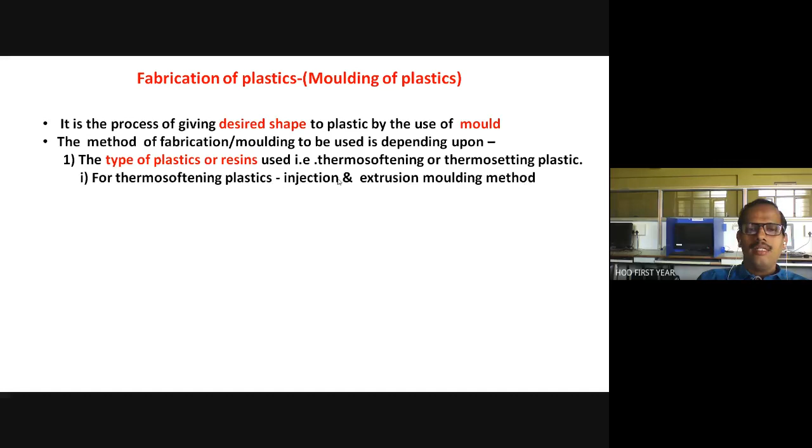Thermoplastic or thermo hardening, and second is the shape to be given. So accordingly, we have four molding methods: compression, transfer, injection, and extrusion.

Compression and transfer molding are used for thermosetting mostly, but they can also be used for thermo softening plastic, not preferably thermosetting plastic. Injection molding and extrusion molding are exclusively used for thermo softening plastic. That is why I wrote only.

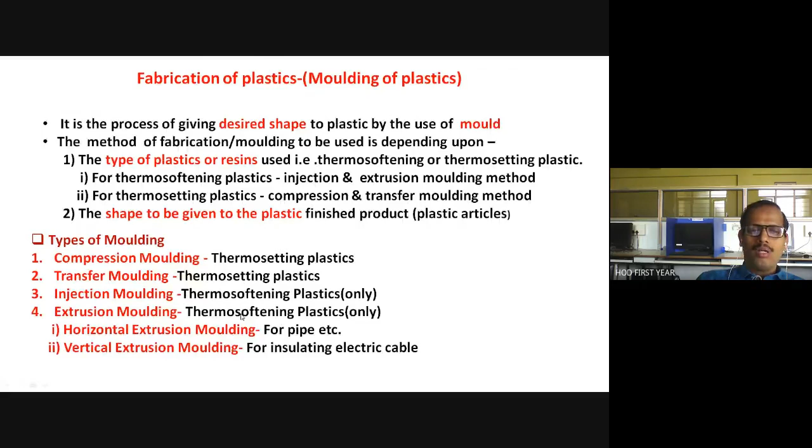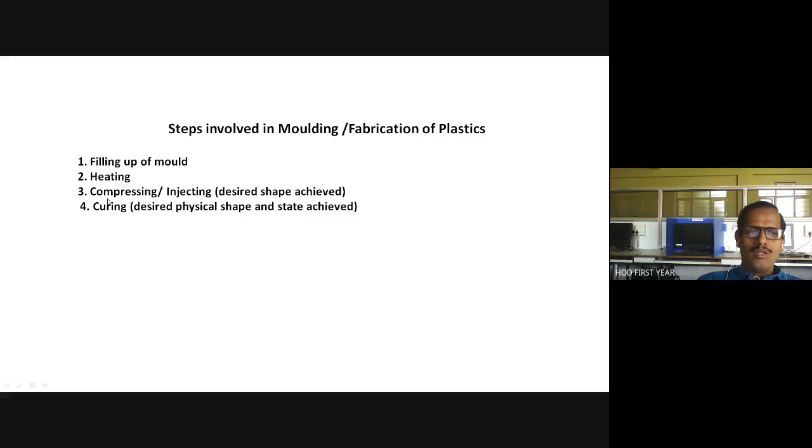So accordingly, this is what the procedure expected from you. As I told you yesterday, you should draw a neat labeled diagram as per the question. Proper diagram. Then in procedure, you should write first about filling up of a mold, then heating, then compressing or injection into cavities to get desired shape, and finally, most important step is curing, to get desired physical state and shape. So after curing, the article is ready, and that is then taken out.

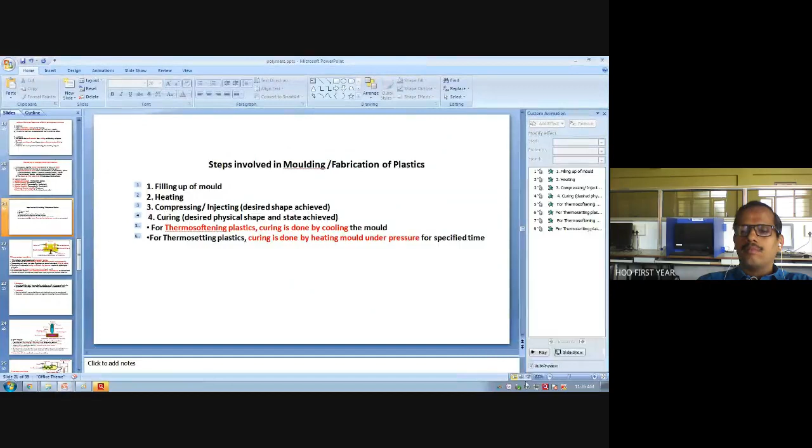Curing for thermosoftening plastic is done by cooling the mold, and for thermosetting plastic, curing is done by heating the mold under pressure for specified time. This difference you should understand. Now, if you know these four steps, you can attend any question based on fabrication.

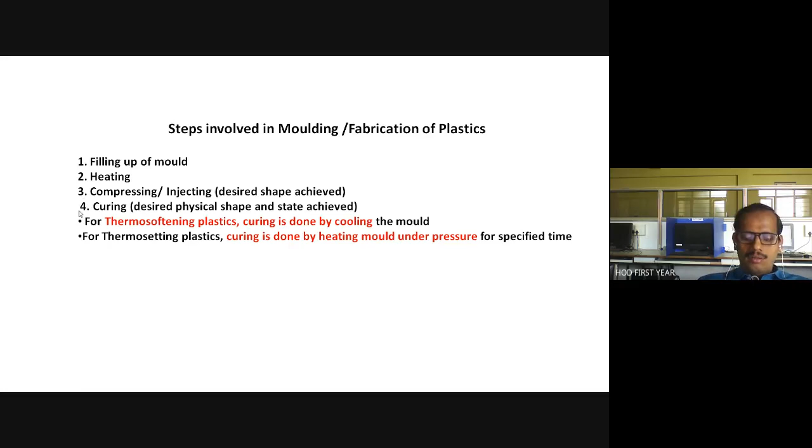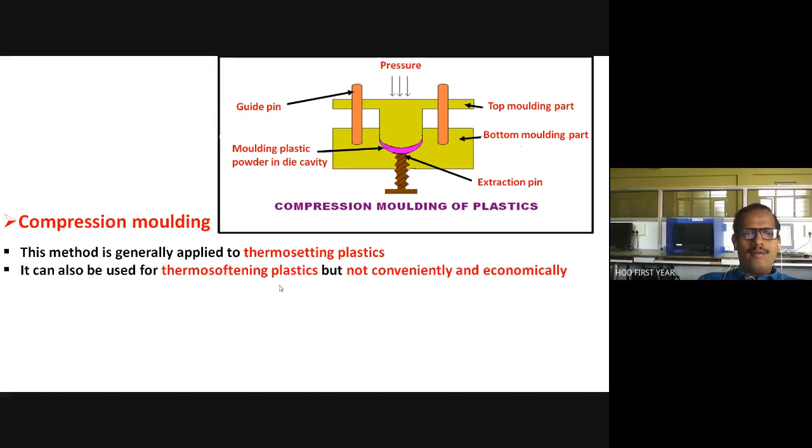So then we studied compression molding. Here, as I mentioned, a neat labeled diagram is a necessary first step, and then you should explain the actual working of the mold. First you should mention the type of plastic that can be molded: thermosetting and thermosoftening both can be molded, but thermosetting preferably, as we studied. Then filling up of a mold, then heating to soften, and finally curing. These three steps you should explain.

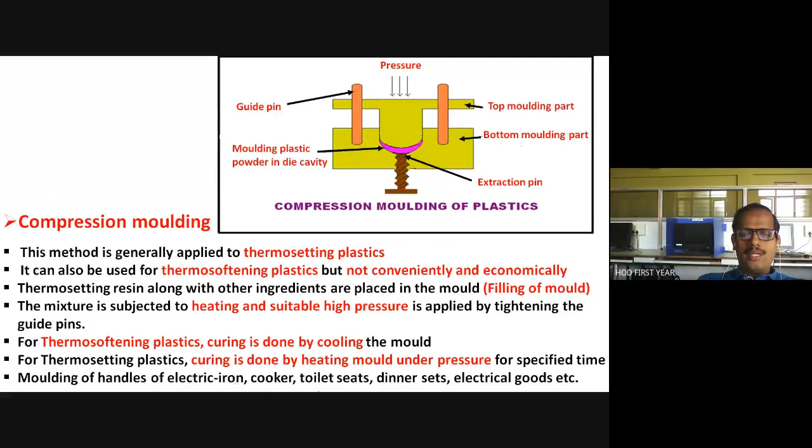Here curing is done by keeping the mold as it is, because this is thermosetting plastic we are molding. And then applications, advantages and limitations. That is the way you should write, as we studied last time. I also showed videos for the same.

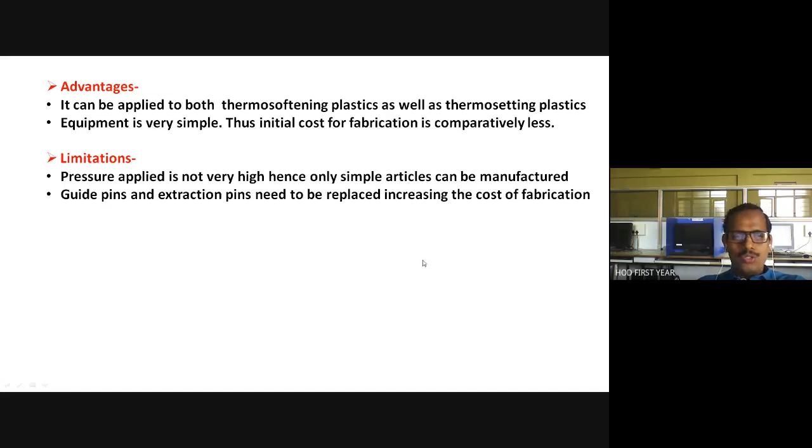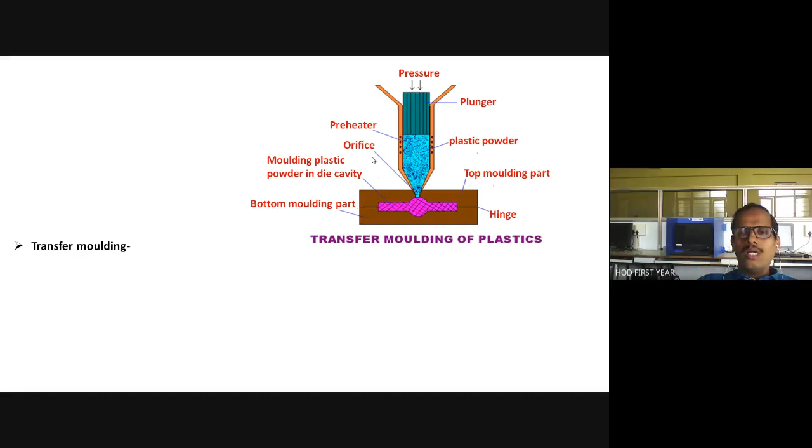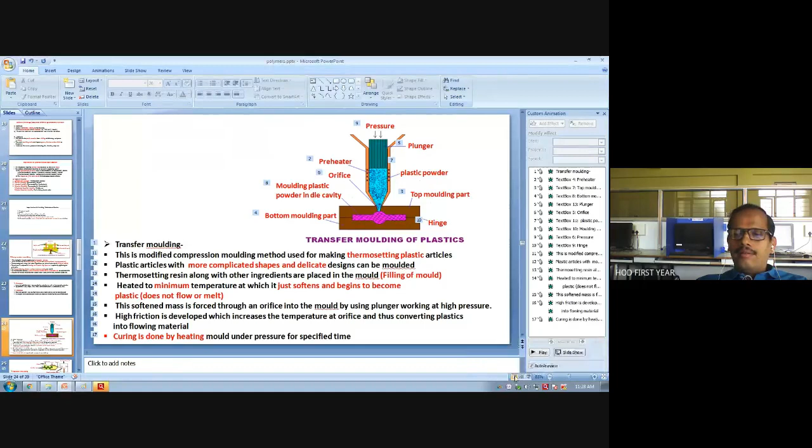Explanation, in a very typical way. First, the type of plastic that can be molded, so it is thermosetting plastic, but this method is especially used for fabrication of articles having delicate shape, complicated shape, which compression molding cannot achieve.

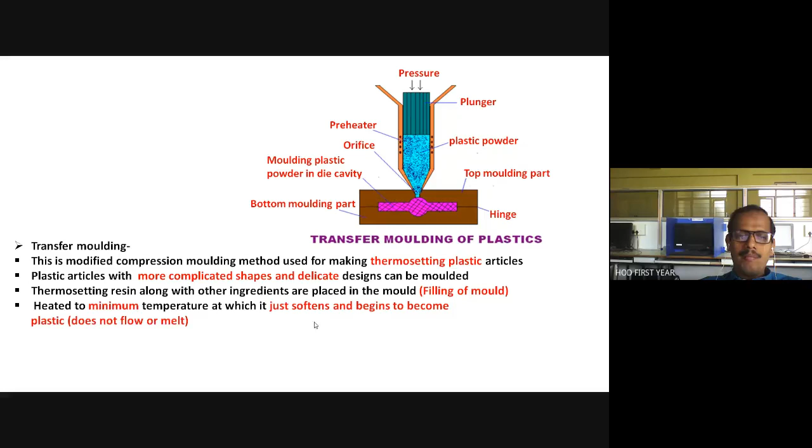So first step is filling up of a mold, then heating to minimum temperature. That is very important, and then inject it into the die with the help of the plunger, and the desired shape article is produced, and then it is cured by keeping mold as it is for specified time. So here you will not find applications, advantages and limitations, but that is required. So in the video yesterday it is there, right? Advantages, limitations and applications, those must be there in your answer.

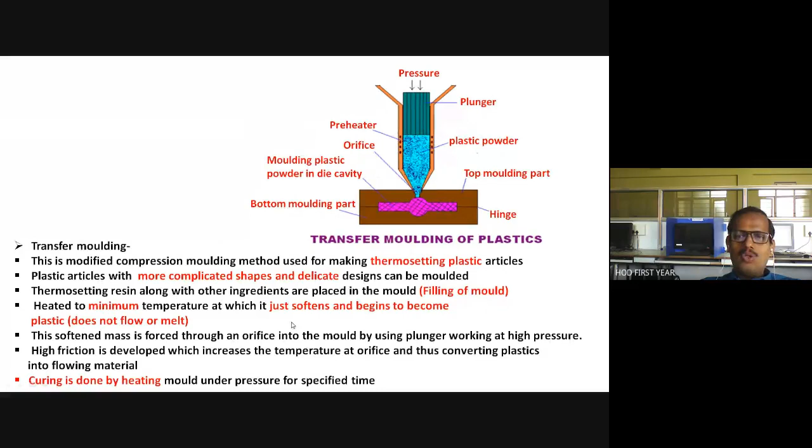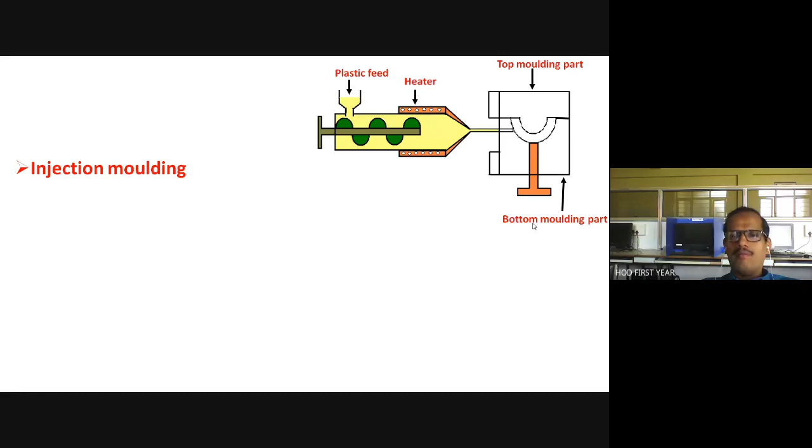Then injection molding. This is the injection mold. So also typical parts, you can write top molding part, bottom molding part. Then hopper or plastic feed. Injecting screw, sometimes it is Archimedean screw, but if you don't remember the word Archimedean, then you can simply write injecting screw, no problem. Plastic powder in die.

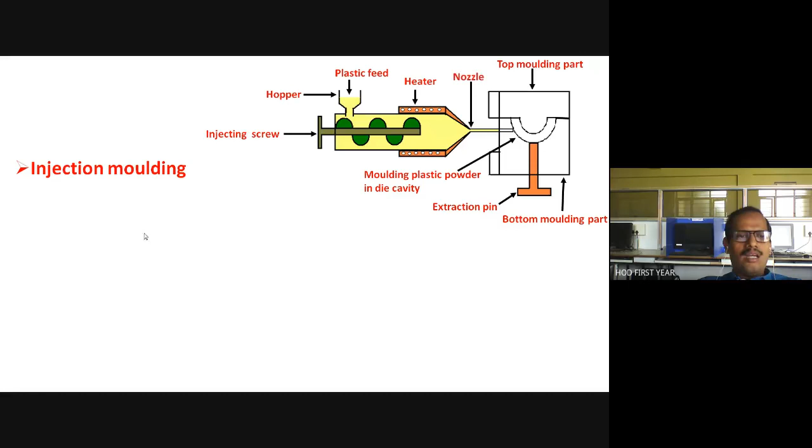Then injection molding working. First, the type of plastic that can be molded, thermo softening. Then the first step is feeding and then softening by heating. Then injection of that material into the cavities of the die. So the article will be produced, and that is cured by cooling.

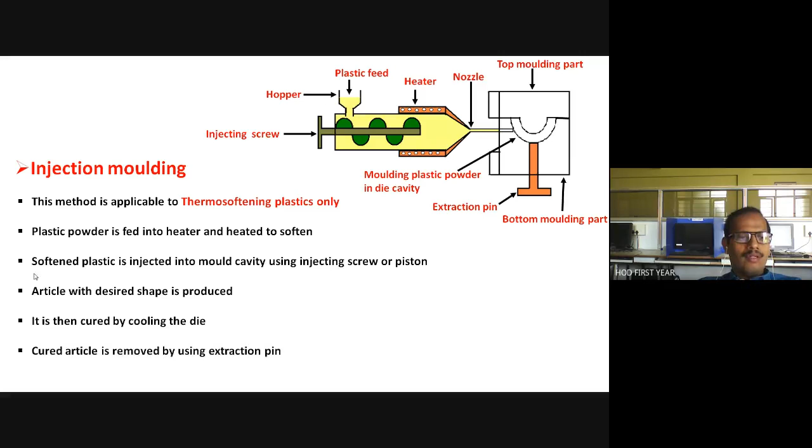Now here continuous cooling is applied, because the resin is thermo softening and the reaction is exothermic. So a large amount of heat is evolved, and we need to remove that heat for the completion of polymerization. So the cured article is removed by using an extraction pin. Then applications, advantages and limitations, we have seen everything. So this is the way your answer should be.

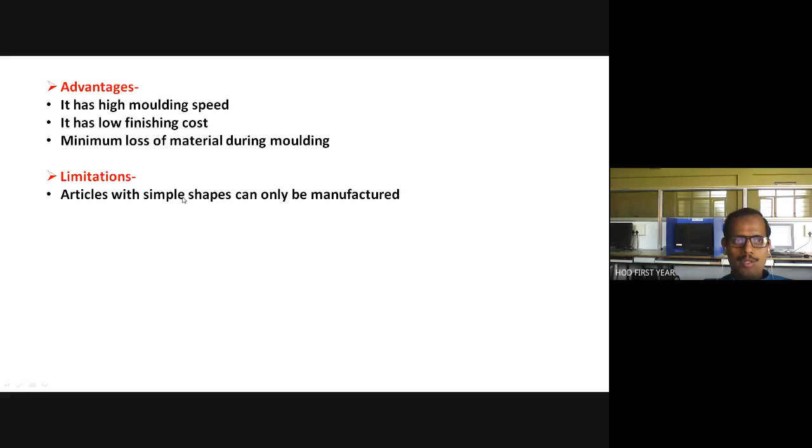Then extrusion molding. We mentioned extrusion is of two types: horizontal and vertical. Horizontal is used for fabrication of continuous articles like tubes, rods, sheets, etc., having continuous shape or uniform cross section. And vertical extrusion molding is for coating of plastic on metal wire, meaning insulated electric cables.

So you must understand the difference between these two methods, because if a question is asked like describe the suitable molding method for the fabrication of insulating cables, you should first mention vertical extrusion molding can be used for fabrication of insulating cables. Then you need to draw a diagram for vertical extrusion molding, explain its working, then advantages, limitations. And if the question is like how can you fabricate a PVC pipe...

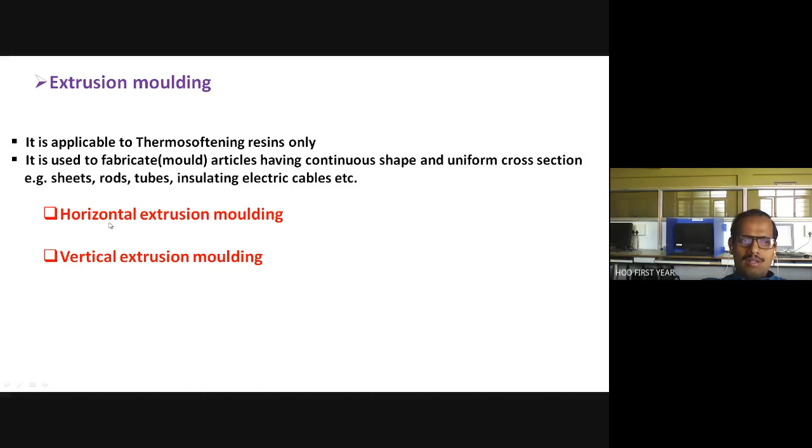So here you should mention horizontal extrusion molding can be used. You have to draw a diagram for this horizontal extrusion mold and explain the working accordingly. This is the horizontal extrusion mold that we have studied last time.

It's very easy to understand. The first step is filling of the mold, meaning the heating chamber. All plastic ingredients are taken inside this heating chamber through the hopper. The second step is heating to soften, done with the help of heating points or heating coils.

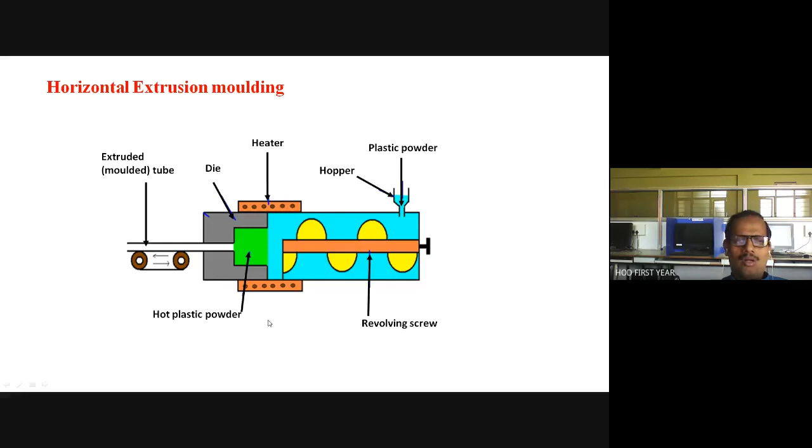Once the material is softened, it is pushed forward with the help of a revolving screw. As this screw revolves, the molten plastic is pushed forward, passes through the die, and gets the required shape. Here we have an extruded tube or pipe that is cooled for curing purpose, and then it is taken out. That's the actual working that we have already studied.

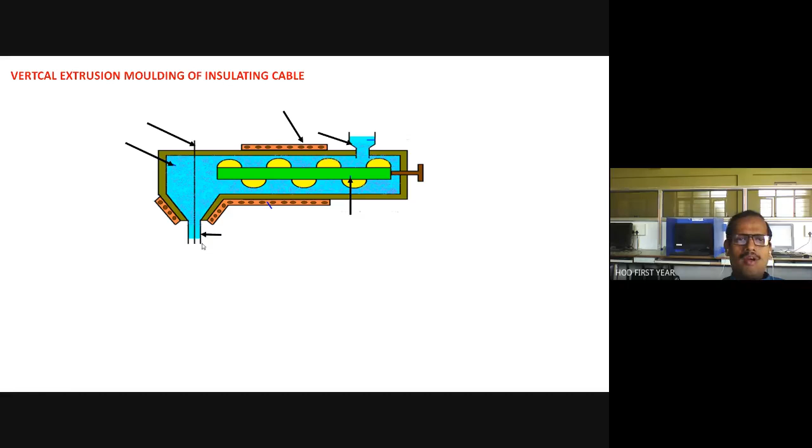I just explained also, and also I have shown you a video. This extrusion molding is especially used for coating plastic on metallic wire, to fabricate insulating cables. So here vertical extrusion molding will be used.

What is the difference between horizontal extrusion molding and vertical extrusion molding? There is only one difference. In vertical extrusion molding, the die is kept at a position at right angle to the direction of the revolving screw. That is the only difference.

Otherwise, the working is the same. First is filling of the heating chamber through the hopper, then heating to soften, and the revolving screw revolves at high RPM. As it revolves, molten plastic is pushed forward, and simultaneously metallic wire is inserted from the top part, which is at right angle or perpendicular to the direction of the revolving screw.

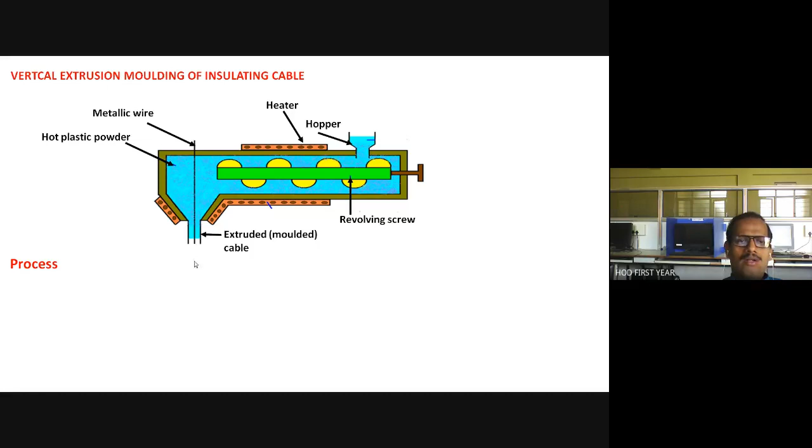The wire is continuously inserted through the die, and the plastic passes through the die. So we get a continuous insulated cable that is cooled for curing purpose. That's all, that is the work.

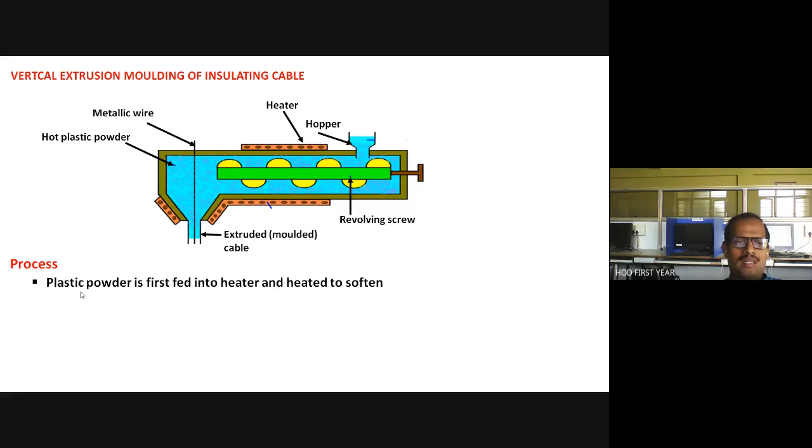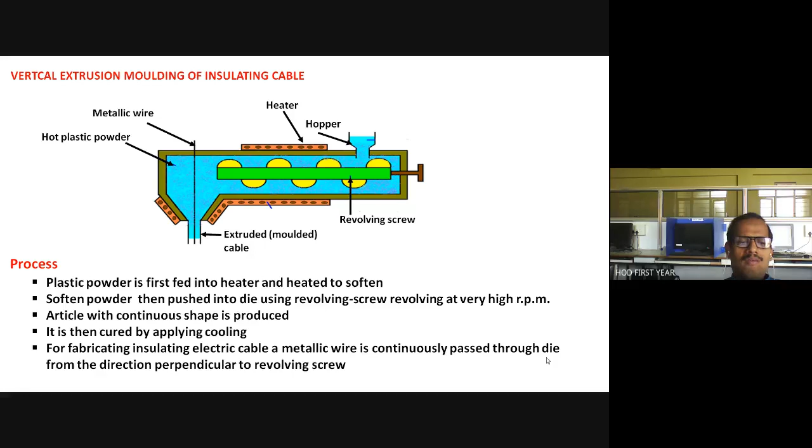Plastic powder is fed into the heater and heated to soften, then pushed forward into the die using the revolving screw, revolving at very high RPM. An article with continuous shape is produced. It is then cured by applying cooling. For fabricating insulating electric cable, a metallic wire is continuously passed through the die from the direction perpendicular to the revolving screw, as I mentioned. So it gets coated continuously with plastic and then cured by cooling.

Very simple. Here also I did not mention applications, advantages and limitations, but those should be there in your answer. I hope you understood how to fabricate plastics.

It depends on the type of plastic and second is the shape to be given.

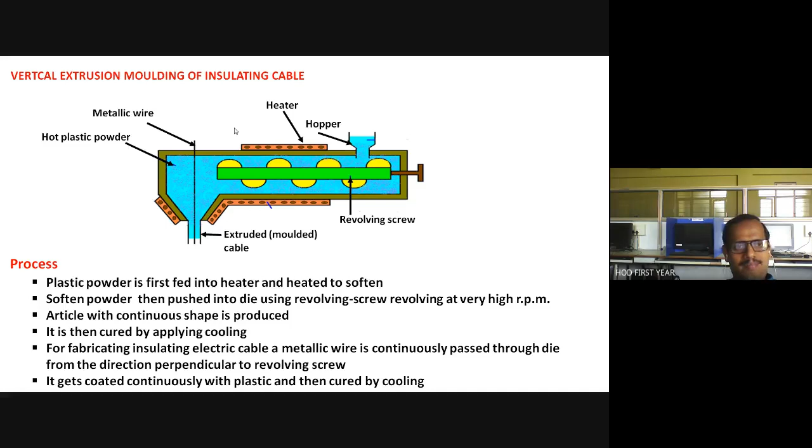Now the next part is again a typical university question, that is, give the preparation, properties, and uses of so and so plastic.

Fortunately, the university has reduced the number of plastics or rubbers. In the last syllabus there were several plastics and rubbers where you needed to prepare chemical reactions, polymerization reactions. But now only 2 plastics are included in the syllabus. First is polymethyl methacrylate, PMMA.

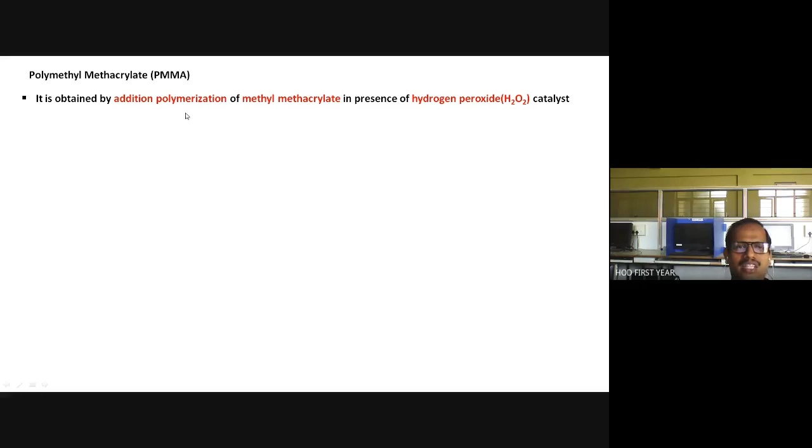It is obtained by addition polymerization, so you should understand that this is an addition polymer. Addition polymer means thermo-softening plastics or thermoplastics. It is prepared by addition polymerization of methyl methacrylate, which is the monomer for the PMMA polymer, in presence of hydrogen peroxide catalyst.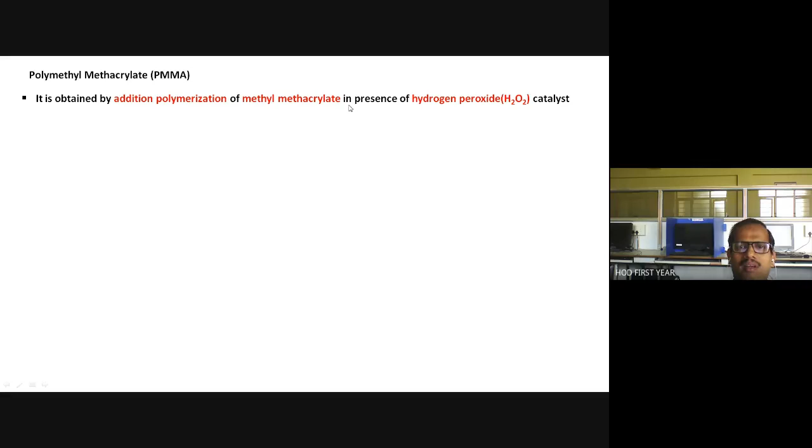Practically speaking, methyl methacrylate is a derivative of ethylene. I told you most of the addition polymers used in engineering or other purposes are in fact derivatives of ethylene. During provisional classes I showed you a lot of such polymers. This is a typical reaction you should understand.

Ethylene means CH2 double bond CH2. After polymerization, whatever the condition, mostly we need peroxide. If I take n molecules, one molecule cannot be polymerized, so when I mix n such molecules in presence of peroxide and heat it, there is no change in the number of carbon and hydrogen.

CH2 remains the same, but the only change is the double bond is converted to a single bond, because that double bond is utilized for bonding or polymerization from both sides. So we get n such linkages together, that is polyethylene.

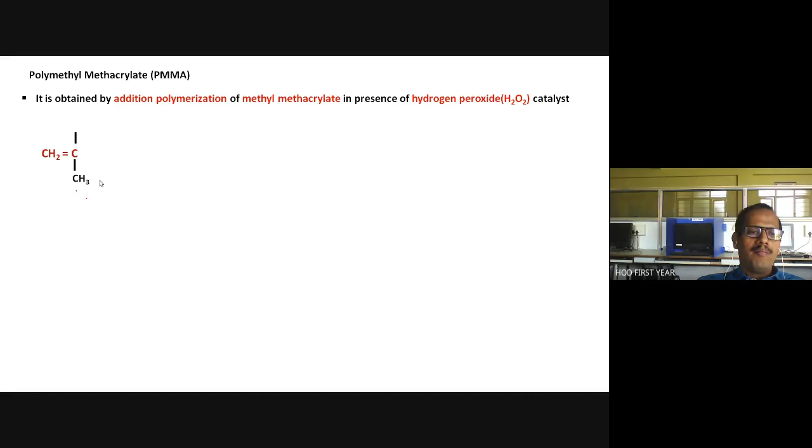So this is the derivative of ethylene. First you should draw CH2 double bond C, then two valencies are replaced, one by methyl group, another by COOCH3. This is our methyl methacrylate monomer. In this case, n molecules should be taken, heated in presence of peroxide.

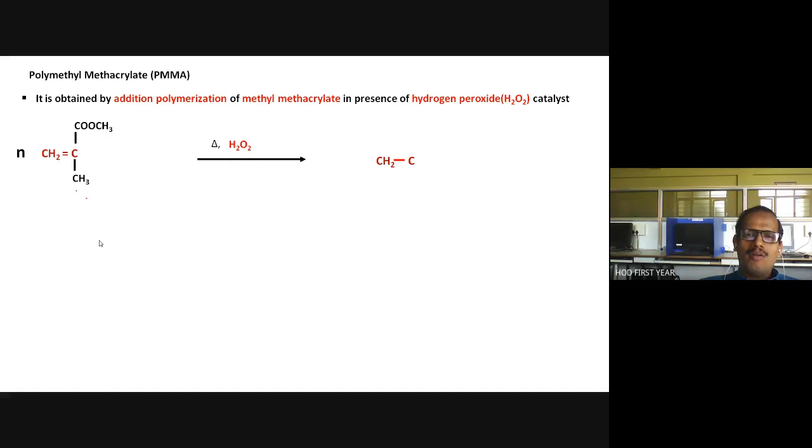What will happen? It's very simple. Just like ethylene polymerized to polyethylene, this methyl methacrylate polymerized to polymethyl methacrylate. There is no change in functional group. Only double bond is converted to single bond, just like polyethylene. So this part remains same. All functional groups remain same, all carbon, hydrogen, oxygen, everything same. No change at all, only double bond is converted to single bond.

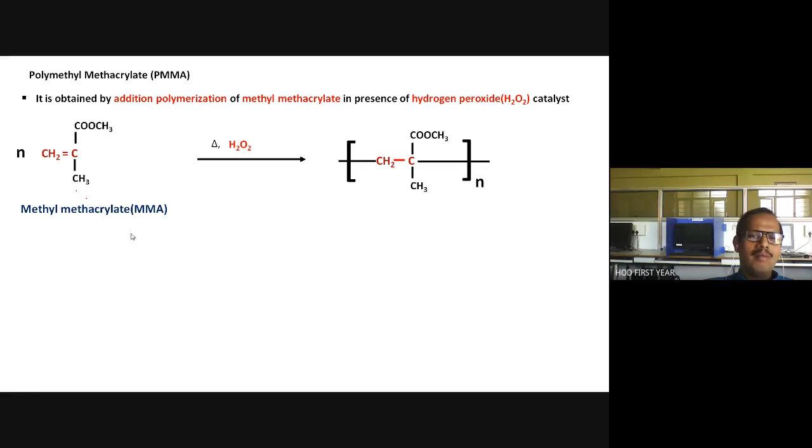That's all, and n such linkages are linked together. That is polymethyl methacrylate, and it is prepared from methyl methacrylate. Very simple. So if you look at the molecule, it is derivative of ethylene, just replace two valencies by methyl and COOCH3. After polymerization, there is no change in functional group, no change in carbon and hydrogen. Only change is double bond converted to single bond, and that double bond is utilized for polymerization linkages.

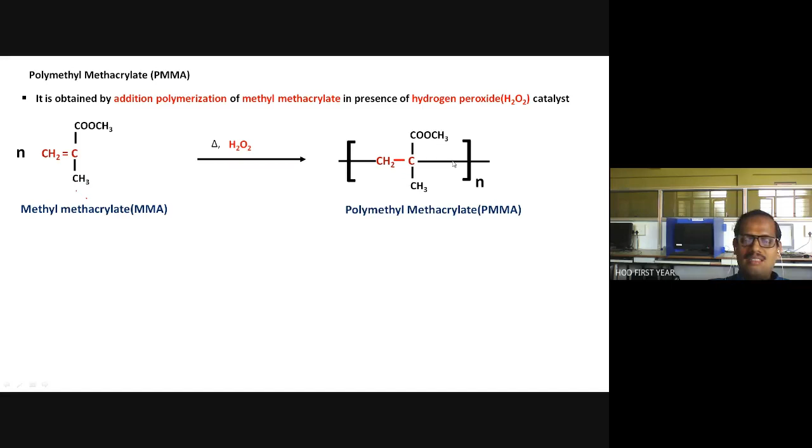And n such linkages are produced. Now, when we have this molecule, we have transparent plastic, just like glass, or I would say more transparent than glass. Refractive index is higher than glass. Can you imagine something more transparent than glass? Yes, but it is possible.

Properties: first property is it is thermosoftening plastic. We have already studied this, addition polymers are thermosoftening plastics. And it has high softening temperature, 130 degrees Celsius. This is again a good property, high temperature, so during molding it will not decompose.

And it has low scratch resistance. This is actually a drawback of this material, not scratch proof - you can scratch it very easily. Its hardness is less.

It has high refractive index. This is the fascinating property, 1.59, higher than glass even, and hence has high optical transparency, more transparent than glass.

It has high resistance to sunlight, high ability of transmitting light. So it's a good plastic because it has good fastening properties to sunlight or heat, to the chemicals, to the moisture, rain, etc.

Uses: since its refractive index is very high, good transmitting property, it is used for making lenses, optical parts of instruments. You may see light fixtures we use at our home. Artificial eye - this is manufactured from this plastic.

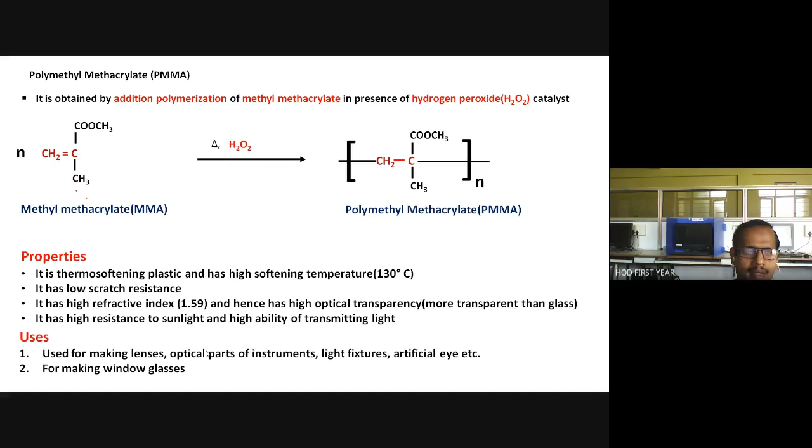Acrylic paint. This is again one more property, it is used in paints.

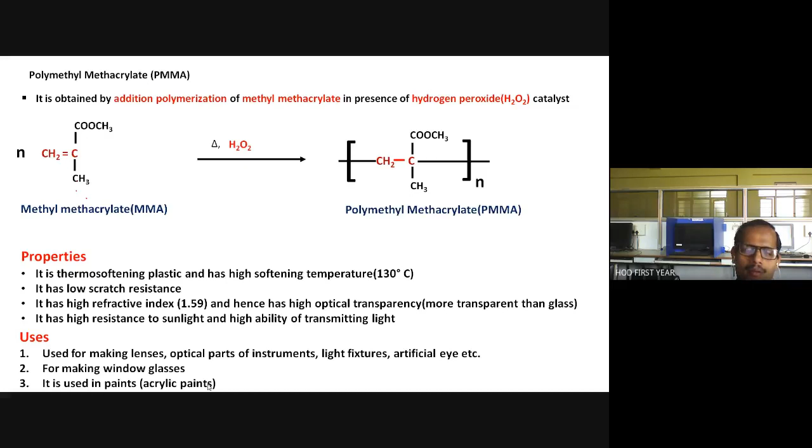Then second is Kevlar. So Kevlar is condensation polymer or thermosetting type of plastic. It is prepared by polycondensation between aromatic dichloride like terephthalic acid dichloride and aromatic diamines like 1,4-diaminobenzene.

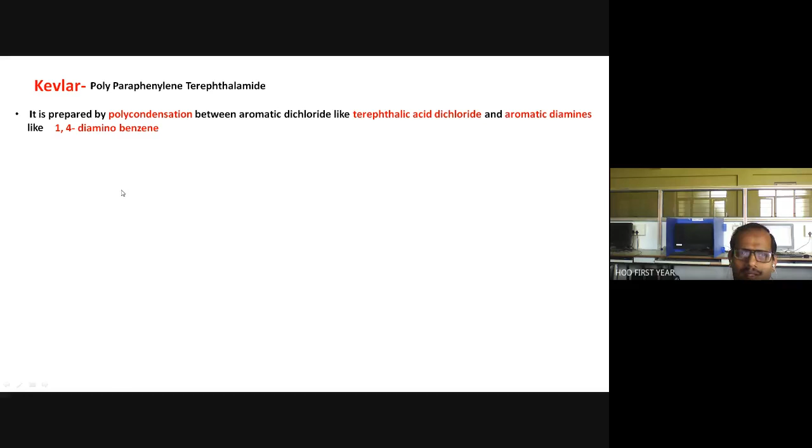Let us see the reaction. Actually, this reaction we have already learned under condensation polymerization, the same thing we have to repeat. I already told this while studying condensation polymerization.

So if you look at the monomers for this plastic, one is terephthalic acid dichloride, which is an aromatic compound - benzene ring is there. Second is aromatic diamine, like 1,4-diaminobenzene, also a derivative of benzene. So benzene ring is common in both cases.

So let us draw the first monomer, terephthalic acid dichloride: benzene connected with two functional groups, COCl, COCl. So this is actually benzene diacyl chloride - this is the acyl chloride functional group, COCl means, attached to benzene, therefore benzene diacyl chloride. Our common name is terephthalic acid dichloride.

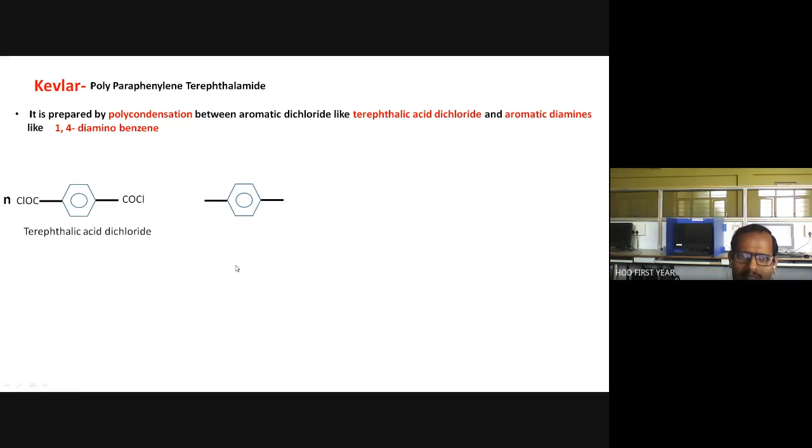Take N molecules, and another is 1,4-diaminobenzene, which is para-diaminobenzene. Amino means NH2 group, and they are linked at para positions. So take N such molecules.

1,4-diaminobenzene, when heated together with the other molecule, what will happen? Condensation, or polycondensation, because many such molecules, N such molecules, react together. So we get polycondensation.

Condensation means reaction between functional groups to remove simple molecules and produce polymer linkages. So here H and Cl will be removed as a simple molecule, and the CO and NH will link together, and amide linkage will be produced.

Again here, NH will link to CO from this side, and this CO will link to NH from that side, and we will get a huge molecule of Kevlar. Benzene remains as it is, linked to CO. Cl is removed, linked to CO from both sides, and CO linked to NH with loss of HCl. From that side also, CO linked to NH, NH linked to benzene ring, and benzene ring linked to NH.

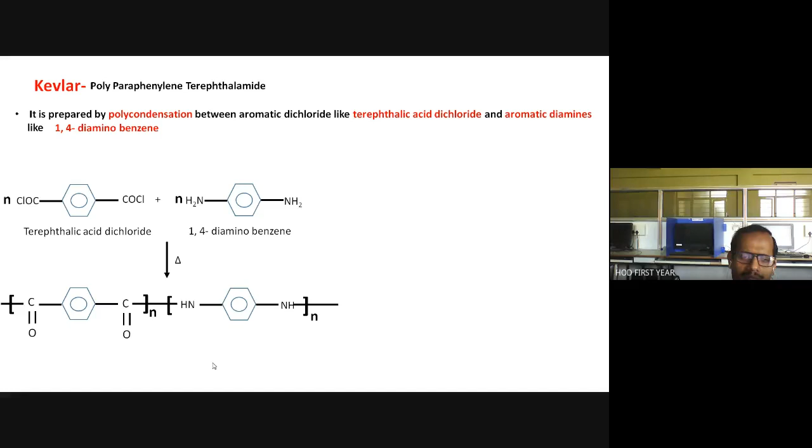Here also we have N molecules of both: this is terephthalic acid dichloride unit, this is the 1,4-diamino unit. There is removal of HCl - that is condensation. 2N HCl molecules are removed, and Kevlar is produced. Now this plastic is very fascinating - it has exceptional mechanical strength.

It is stronger than even steel. Just imagine something stronger than steel - very difficult, and it is polymer, plastic, but it is possible. This is a very fascinating plastic because it has one more inherent advantage. So what is the inherent advantage of plastic or polymer?

What is the most important property of plastic with respect to metals and alloys as far as engineering use is concerned? Can somebody tell me? We studied four materials: first metals and alloys, second ceramics, third polymers, and fourth composites. So when we differentiate polymer and metal...

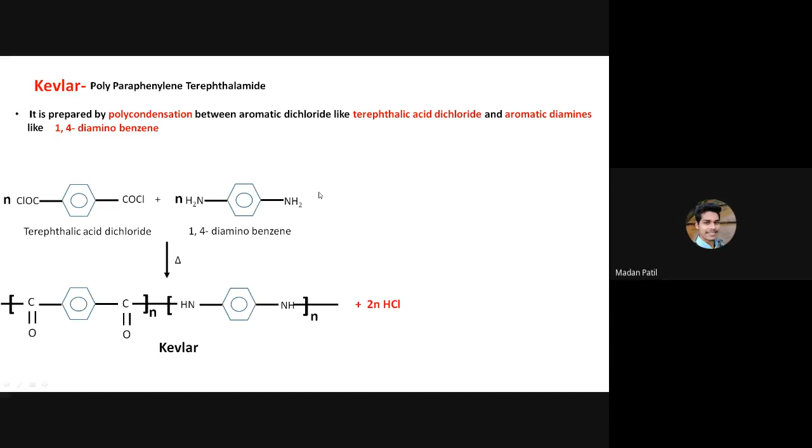But after extracting out metal, suppose I have one metal ball, spherical ball, and I also have one polymer or plastic ball - what is the important difference in engineering perspective? Sir, weight. Exactly, absolutely correct, that is the answer I want. So density, weight is related with density, mass per unit volume - mass per unit volume for polymer is very less.

So in case of Kevlar, we have low density and mechanical strength is 5 times higher than steel. It's a magical material, that is why it is used for aerospace applications. It is exceptionally strong, 5 times stronger than steel, and at the same time density is low.

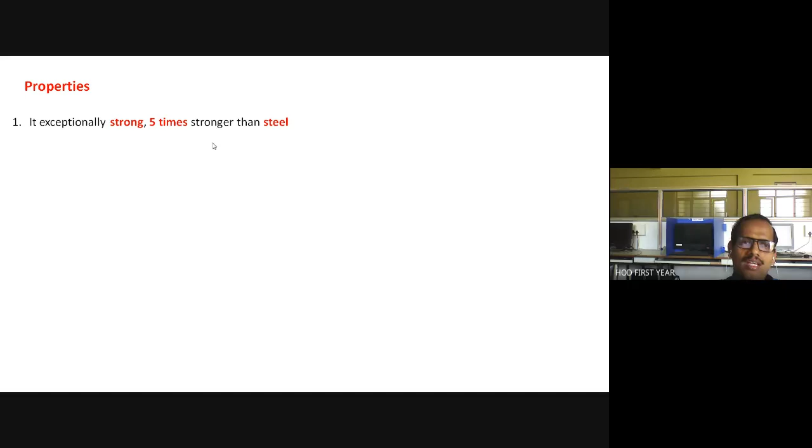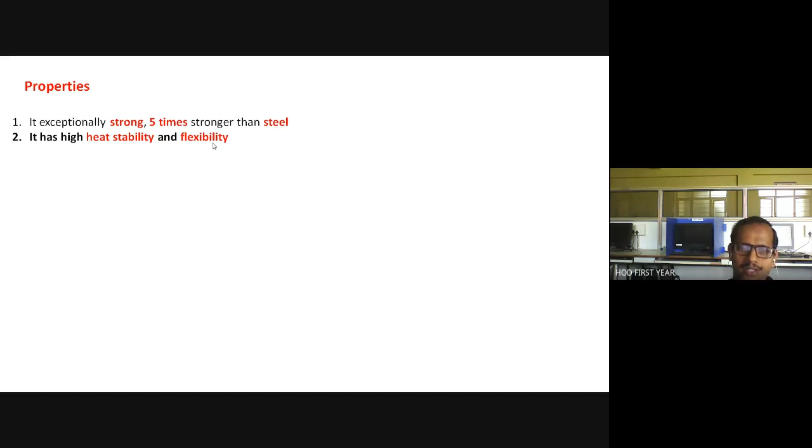It has high heat stability and flexibility - that is one more advantage. It does not lose its strength even at 196 degrees Celsius, almost 200 degrees Celsius it can sustain. Mechanical properties are not varied, that is why this is sometimes used as a structural material.

It has high resistance against almost all solvents except strong acids. It has resistance to almost all solvents, meaning it will not dissolve in acetone, alcohol, or any other solvent, but it will dissolve in strong acid. Why?

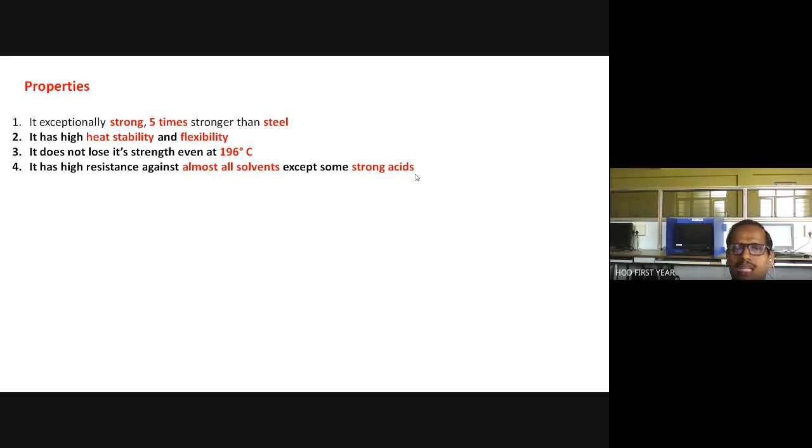Strength is higher than steel. Uses: it is used in aircraft and aerospace industries because of low density and high strength - strength higher than steel. It is used for preparation of vehicle parts, brakes, clutch lining, ropes, cables, protective clothing, bulletproof vests, helmets especially are made from it.

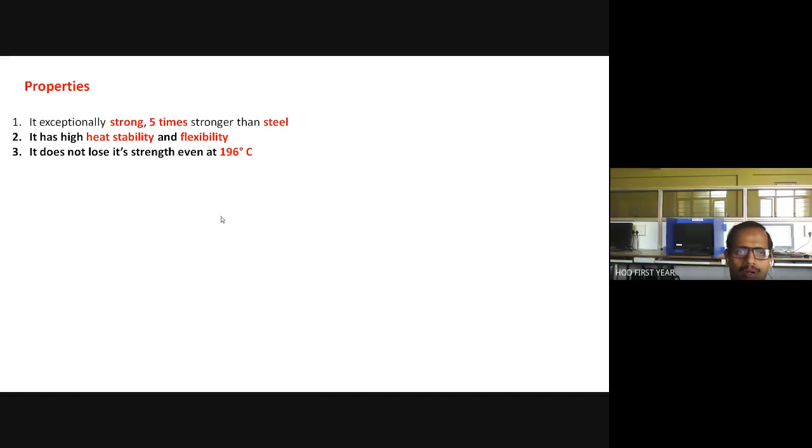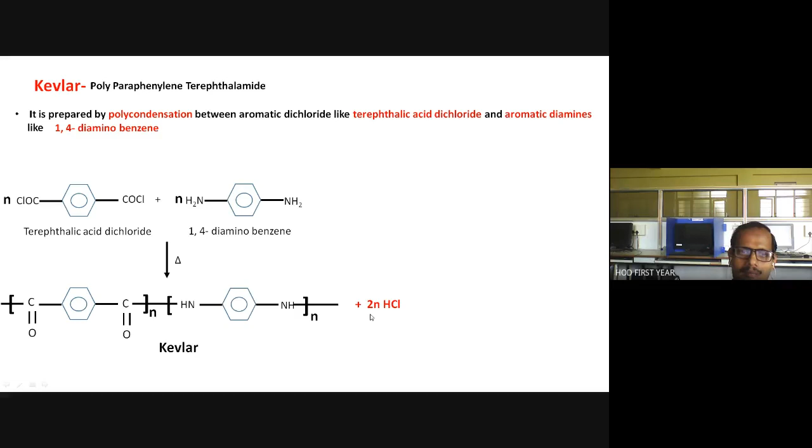So and so forth, several applications. This is the way you should present your answers: first something about the actual reaction in one line, the correct structure of monomers, then polymers, byproduct - it should be correct, that's the key point, and then properties and uses. You can add other uses also if you know.

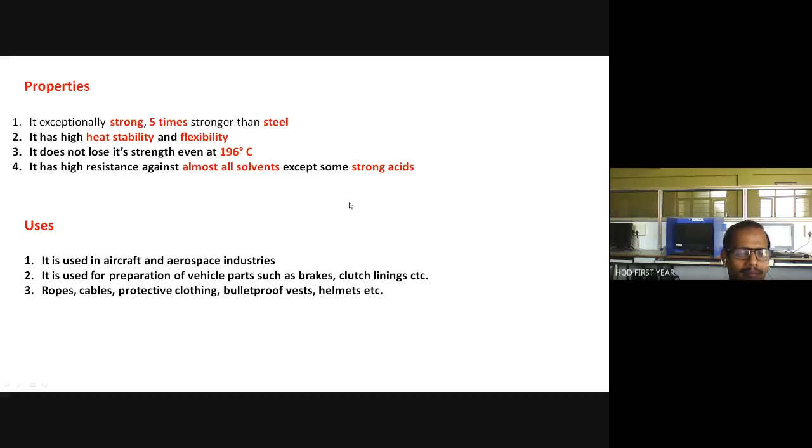Then we will turn to the next part.

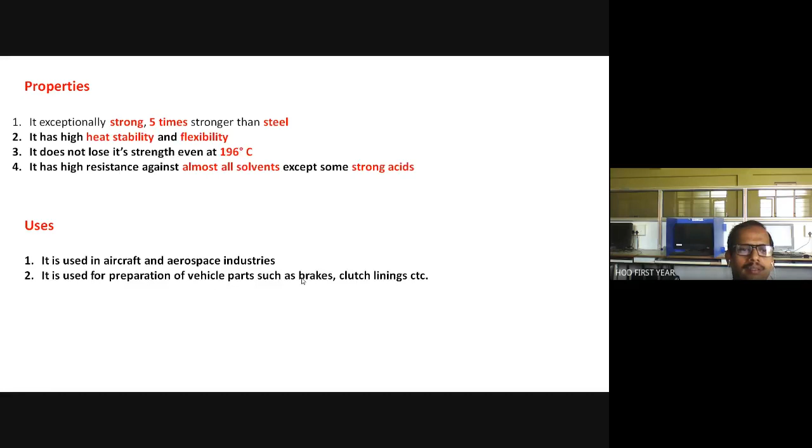Now we will turn to the properties of polymers. Very few are included in our syllabus. This is glass transition temperature, or glass transition state and viscoelastic state. Then molecular weight we have to study, and then conducting properties.

So this is the observation with plastic or polymers. You might have observed that in cold season or cold countries, plastic becomes hard and brittle. That is this property, glass transition state. Plastic is transformed to glassy state. Actually glass is hard but easily breakable, while plastic is flexible and not easily breakable like glass. But at a particular temperature, or below that temperature, they behave like glass and brittle. That is glass transition state.

This is an important physical constant, especially while defining utilization of plastic for any purpose. How is it defined? Temperature below which polymer becomes hard, brittle and glassy. Below that temperature means after cooling, it becomes hard, brittle and glassy. Above that temperature, it is soft and flexible. That is known as glass transition temperature. That temperature is the borderline. Below that temperature, it is hard, brittle and behaves like glass, it breaks like glass, but above that it is safe, soft and flexible.

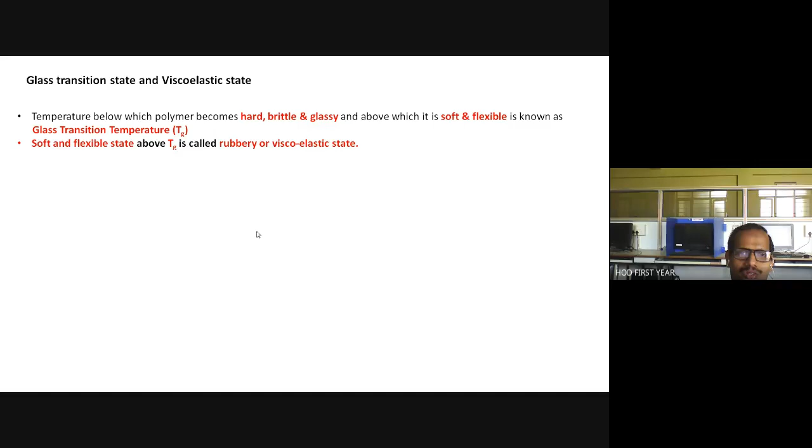So we should know that temperature before its use. The soft and flexible state above Tg is called rubbery or viscoelastic state. After further heating, it becomes viscofluid or viscous fluid and starts flowing, called viscofluid state.

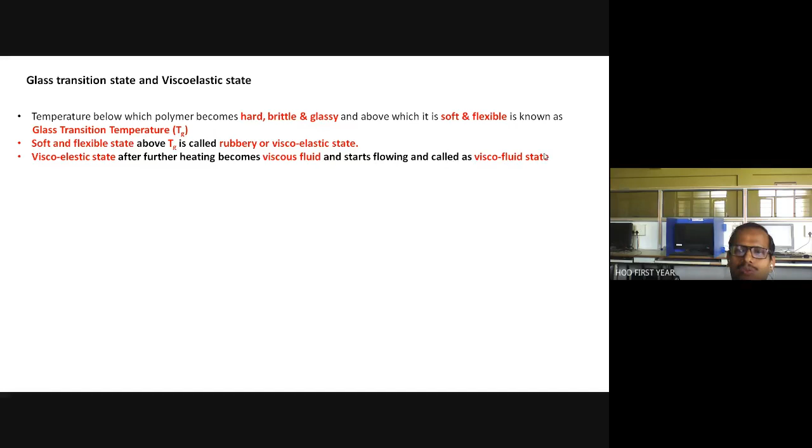Now you will understand from the diagram. This is the temperature line, temperature increases in this direction. So this is our glass transition temperature, Tg. How do we define it? Temperature below this means temperature decreases in this direction. Below this, polymer becomes hard, brittle and glassy, and above it, it is soft and flexible. Below this I have shown glassy state, brittle state, easily breakable like glass, and above it is viscoelastic, flexible state. So this is happening below and above Tg.

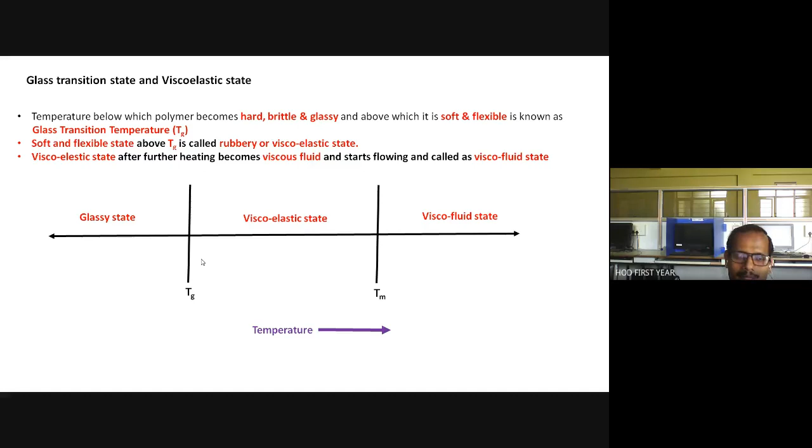Now there is one more temperature line, and that is above Tm. Tm means melting temperature. If we keep heating above viscoelastic state, after melting point we get viscofluid state, and the plastic or polymer starts flowing. That is above Tm. So these are very important properties when manufacturing articles out of plastic and defining its utilization, because there is temperature variation from place to place, country to country, machine to machine. So we have to select proper plastic so that it will not become like glass and will not break.

Now if you look at polyethylene, its Tg is minus 125 degrees Celsius. It's a very safe plastic. Below minus 125, it becomes glass type; above that it remains flexible and doesn't break, like glass. Polypropylene's Tg is minus 18 degrees Celsius; below that it becomes like glass. Polystyrene is 100 degrees Celsius. So you can mention one or two examples, this diagram, and the definition part.

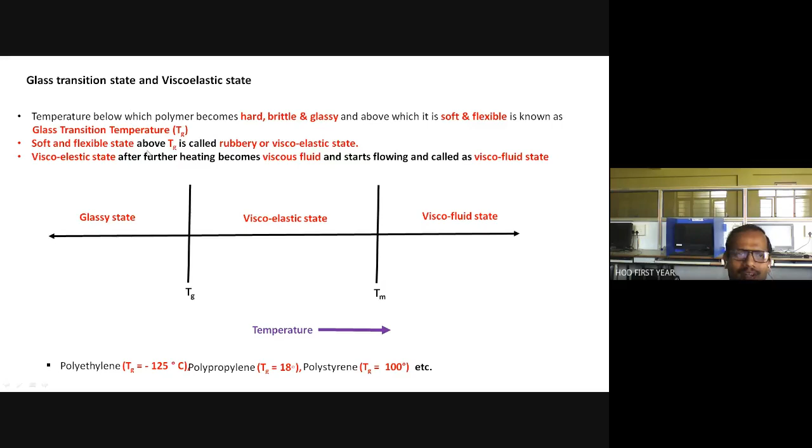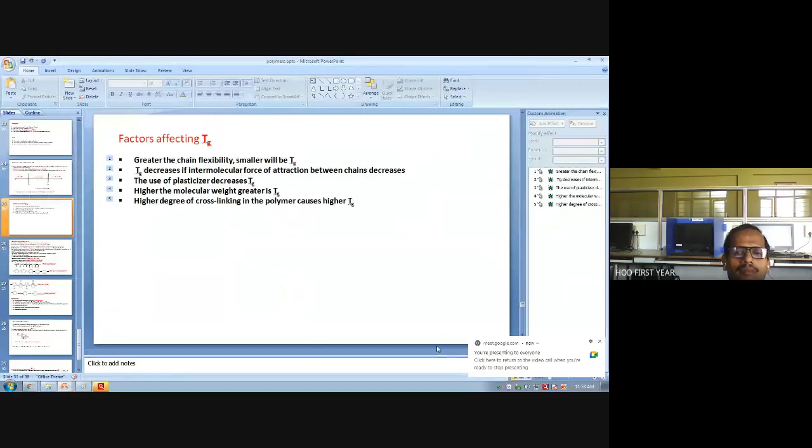Now factors affecting Tg also you should mention in your answer. What are the governing factors which increase or decrease Tg? So what is our observation? Factors affecting Tg: greater the chain flexibility, smaller will be the Tg.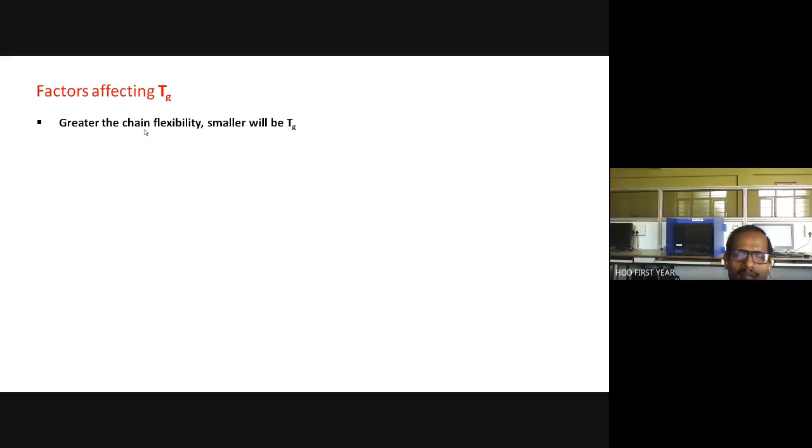So it totally depends on the structure of plastic or polymer. If chain flexibility is high, as in case of thermosoftening plastic where there is no cross linking, smaller will be the Tg. Then Tg decreases if the intermolecular force of attraction between chains decreases, obviously. As this force of attraction between chains decreases, Tg decreases.

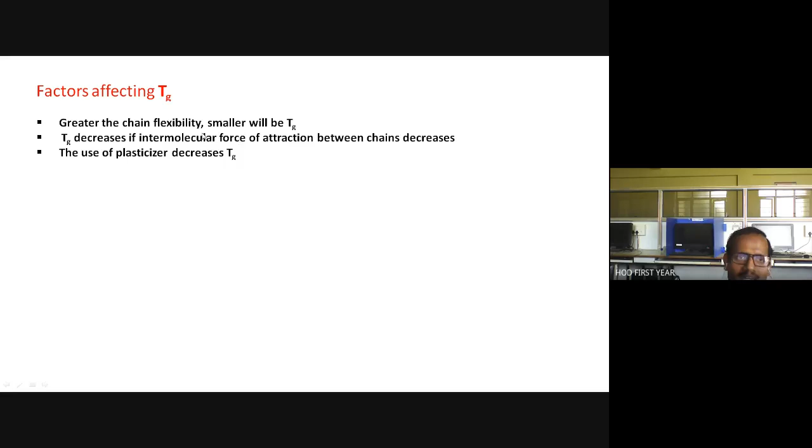The use of plasticizers decreases Tg. Actually we want low Tg, it should be less than the operating or service condition, otherwise it will immediately become like glass. So how to get this done? Sometimes we want that particular plastic to not become brittle, so what we do is modify its property by adding some compounds called plasticizers. When we add plasticizers, they reduce intermolecular force of attraction and enhance flexibility, so Tg is decreased, and that plastic can be used even at low temperature.

Then higher the molecular weight, greater is the Tg. As molecular weight increases, Tg increases.

We saw earlier that polyethylene had Tg of -125, but polypropylene's was higher, and polystyrene's was even higher. So higher molecular weight, higher is the Tg. Higher degree of cross-linking in the polymer also causes higher Tg - this is the counterpoint to the first and second point. More cross-linking means less flexibility, and less flexibility means Tg increases. These are the factors you can mention in your answer. Otherwise, whatever is given on the slide is sufficient for this note.

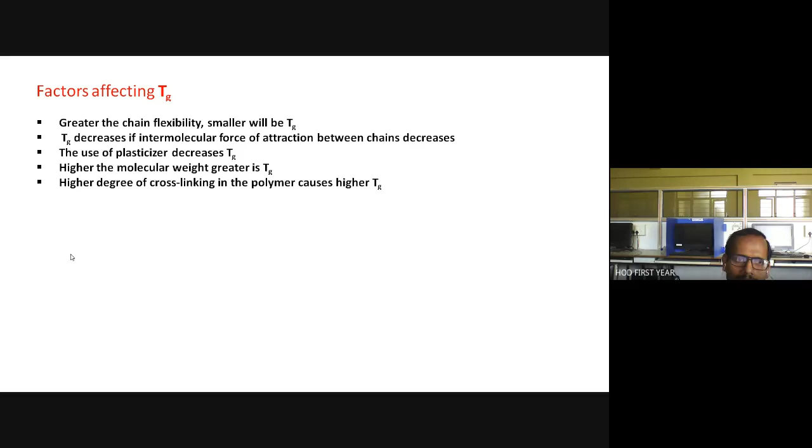Now the second property is again a fascinating one. Actually, this property states the future of plastics or the future of electronics - these are the building blocks of future electronics. Presently we use semiconductors like silicon, germanium, and so on as materials in semiconductors to build electronic components, all circuits - everything in electronics is based on that. But in future, these polymers are going to replace these typical semiconducting materials - these are conducting polymers. Now, when we talk about polymers or plastics, they are normally insulators.

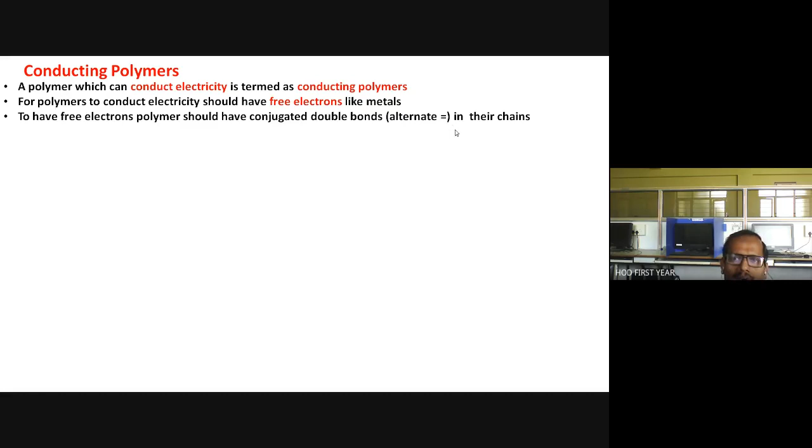So to have free electrons, polymers should have conjugated double bonds. A conjugated double bond means alternate double bond, single bond, double bond, single bond in their chains. If you look at the polyacetylene molecule or polyparaphenylene, you will understand what I mean - conducting polymers have conjugated double bonds.

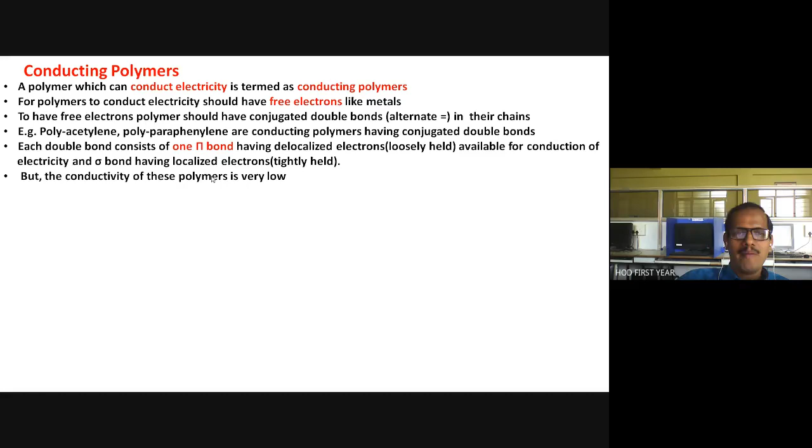But even having pi bonds, the conductivity of these polymers is very low. It is measurable, and it is proved they are conducting, but for practical application that conductivity is not sufficient. Even in case of semiconductors like silicon, its conductivity and the required conductivity is low. So what do we do in that case? Can somebody tell me?

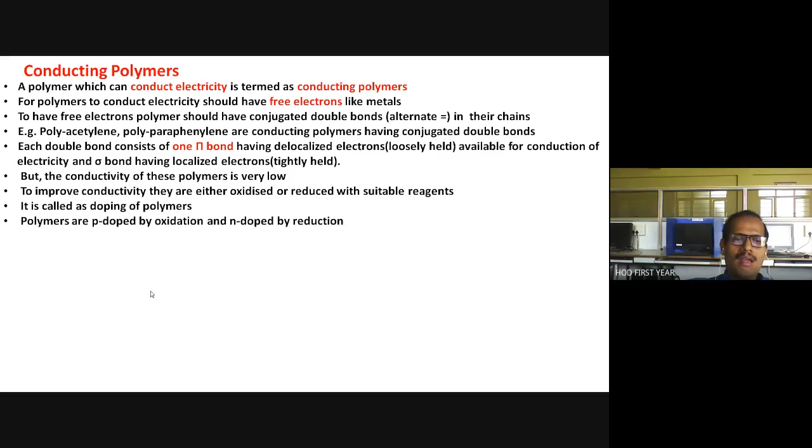So this is what polyacetylene, I am writing now. This is one linkage. This seems to be ethylene. But when it is linked in this way, we call it polyacetylene.

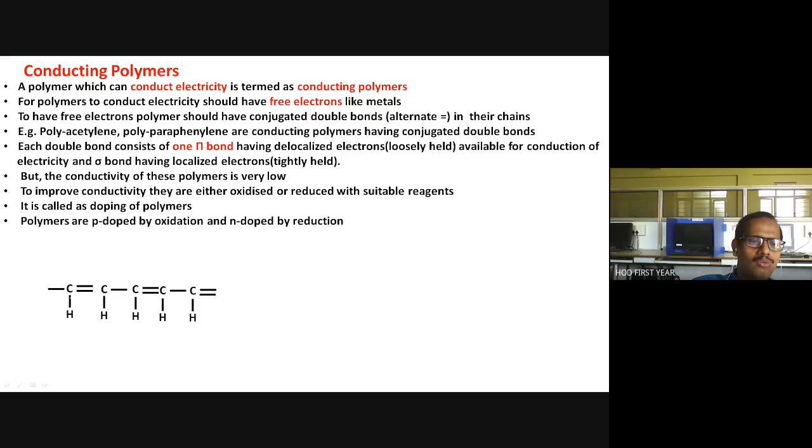Let me check the time, we have 5 more minutes. I will show you how this molecule is derived. This is polyacetylene, but you may think this is ethylene, so why don't we call it polyethylene? No, it's not polyethylene. Polyethylene is something like this.

CH2 N times, that we have studied, right? So this is not polyethylene. Here we have one more bond, so that is why it is polyacetylene. How is it derived? It is derived from acetylene, CH triple bond CH.

This is the monomer in this case, N molecules. When they are heated in presence of peroxide catalyst, this pi bond will be utilized for polymerization. What we will get is this CH, the triple bond is converted to double bond because one bond is utilized for polymerization. Otherwise there is no change in CH, it remains as it is.

So this molecule will grow from this direction and another direction. This will again lead to another polyacetylene molecule this way, CH and CH, so and so forth, N times it will be linked, the same molecule. So this is what the polyacetylene molecule.

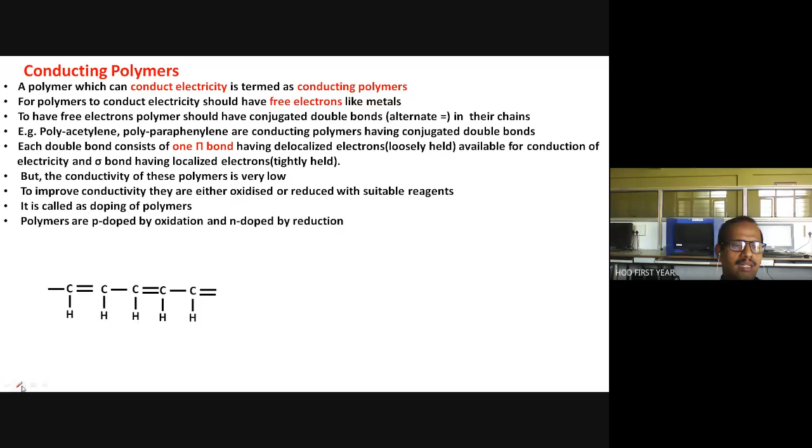So this is polyacetylene molecule. This is one acetylene, this is another, this is third and fourth. Now if you look at this molecule at the backbone chain, you will find alternate pi bonds. Single bond, double bond, single bond, double bond, single bond, double bond, single bond, so and so forth, N times they are linked together.

So this pi electron, here we have one sigma bond and another is pi bond. These pi electrons are loosely held, delocalized. So these electrons are available for conduction.

So when I apply current across this molecule, if potential is applied, what will happen? This pi electron will be shifted to this position, then this will shift to the next position, so and so forth. So what is happening actually? Electrons are moving, and moving of electron means current, flowing of charge, flowing of electron is actually current.

So that is what is happening with such molecules having conjugated pi bonds, meaning having double and single bonds. Simply pi bonds start jumping to the alternate position, next position actually. So electrons move and we get current, but that is not sufficient. So to get sufficient conductivity, we have to dope them by oxidation and reduction process.

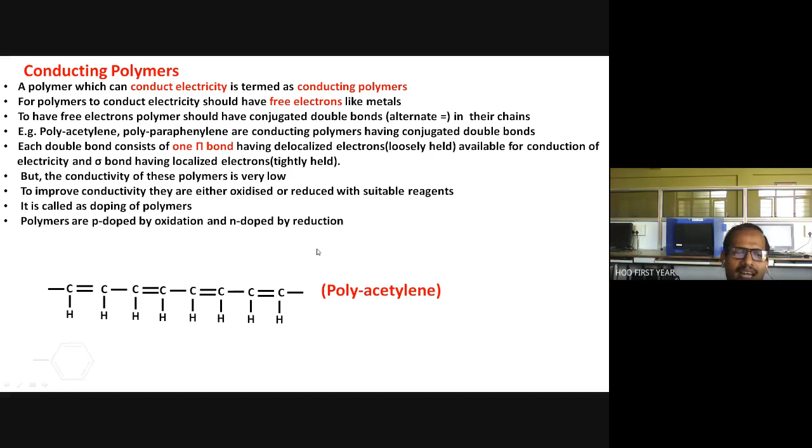So this is polyacetylene and this is polyparaphenylene. This is very easy to write, we just have to build benzene molecules together. Now if you look at the structure here, we have a huge conjugate system. Single bond, double bond, single bond, double bond, single bond, double bond, single bond, double bond. If you look at this, we have a huge conducting system.

So these pi electrons simply jump into the next position and we get sufficient current available. So this is what polyparaphenylene. Next part we will see in next lecture tomorrow.